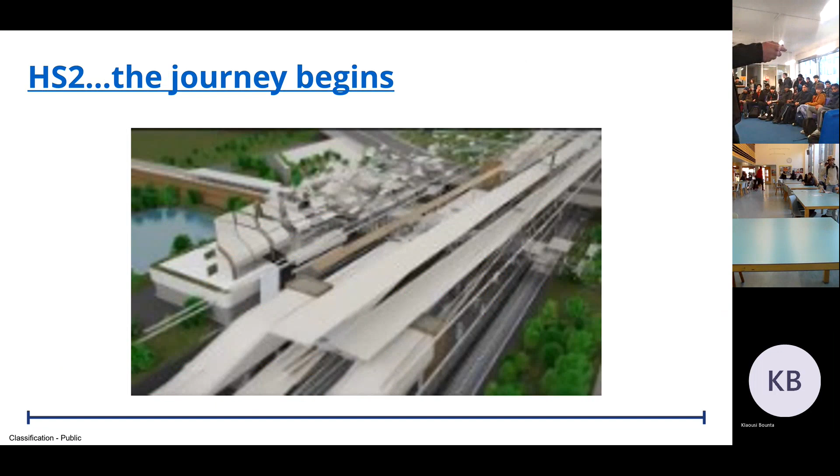So I'm just going to play you, if this plays, a video which will give you a sense of what it is that we're actually building.

So play it at the beginning, at the end.

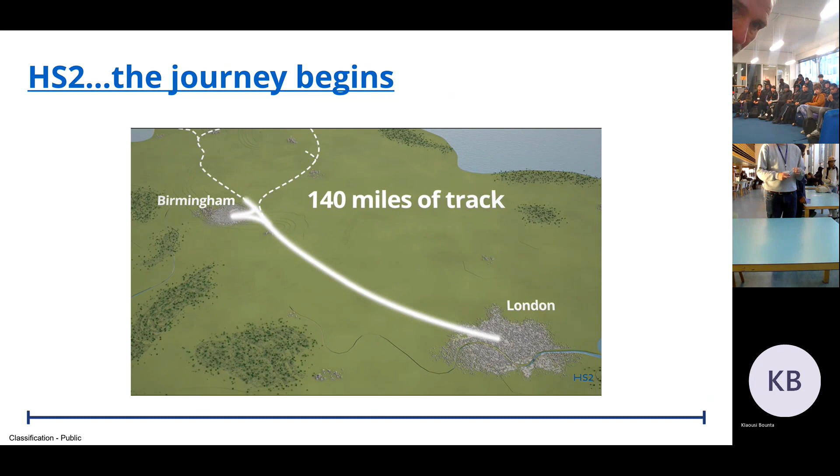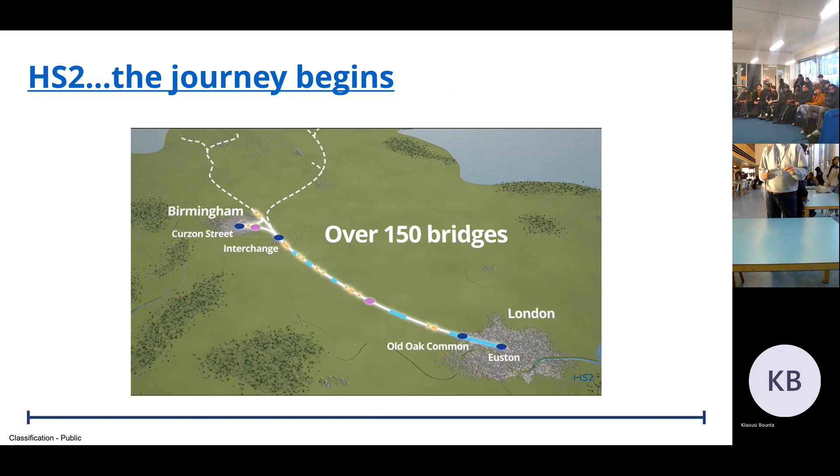Well, maybe I'll come up later because we haven't got the set right.

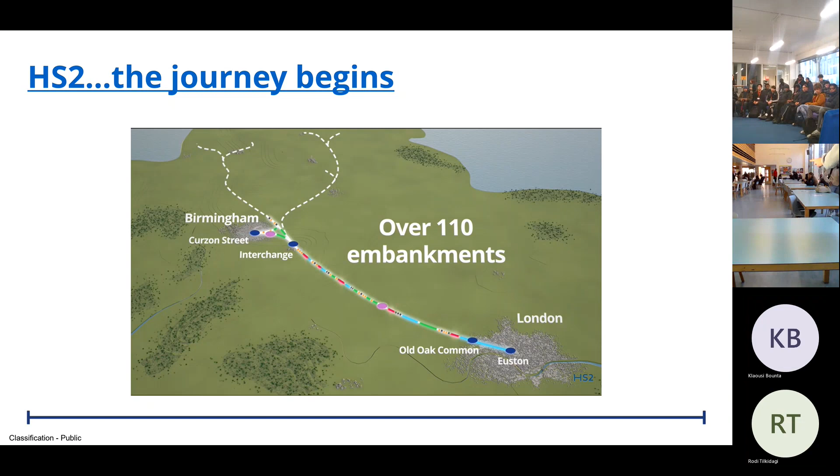So you can see from that video, it didn't actually play the whole thing, but what it'll actually do — so HS2 as a project will not only be building a train track from here to Birmingham, we'll also be building 4 stations.

There's the terminus, which is in Euston. There's a station being built at Old Oak Common in West London. There's one further up, just by Birmingham Airport, being built, called Birmingham Interchange. And then you'll have the destination station, which is Curzon Street in Birmingham. So that will be 4 massive, completely new stations built as a result of this.

As it said on that little clip, there's 32 miles of this that will be in tunnels, so there's a huge amount of tunnelling going on between London and Birmingham at present. Now, obviously, that's cutting into a lot of green belt land, so that means a huge amount of trees being ripped up, but they're all being replaced — in fact, more trees will be planted than were dug up. So whilst there's a lot of disruption happening, there'll be a huge amount of benefit for people living particularly in Camden, in London, out around Acton, and parts of Birmingham as well.

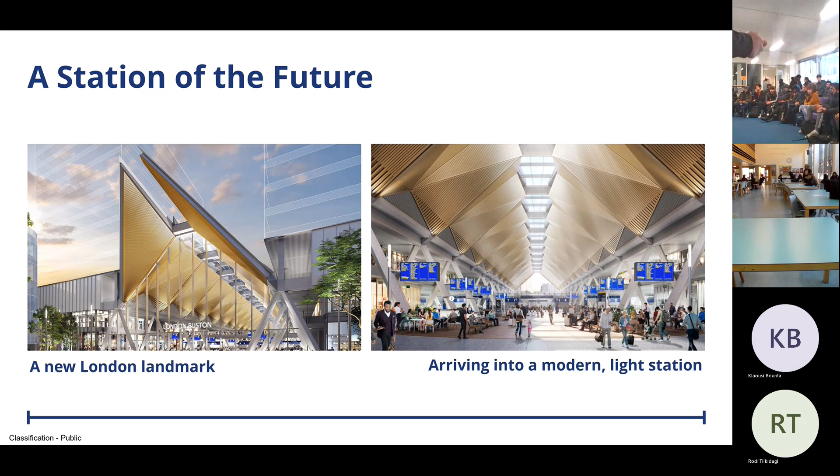We're just having to move things around at the moment. You know those jigsaw puzzles that are in a frame and you've got to move the pieces around until you get to the final solution. That's what this is like.

So when one of our senior people on the project was told about this job, he said, are there any obstacles around it? And they said, well, a few. And the few were there were buildings in the way. We had to do excavations.

Can you guess how many bodies or remains of bodies we had to bring out of the ground, because there was a cemetery, an old cemetery on the site? Have a guess at how many bodies were taken out. 40,000. There were the remains of 40,000 bodies that had to be removed.

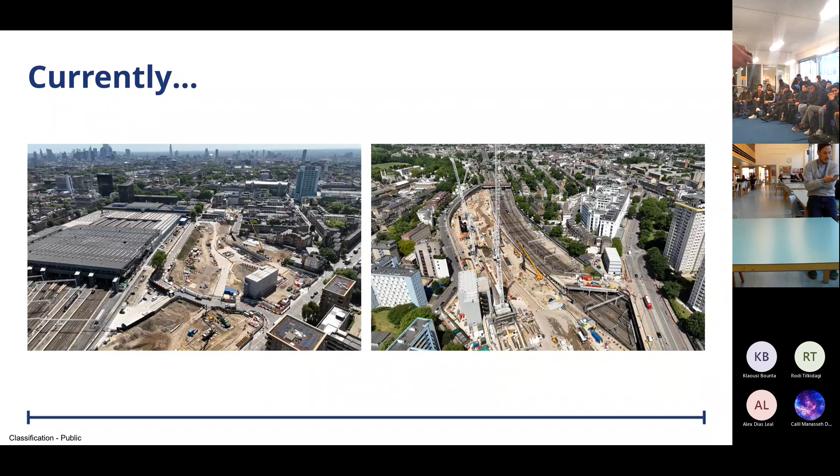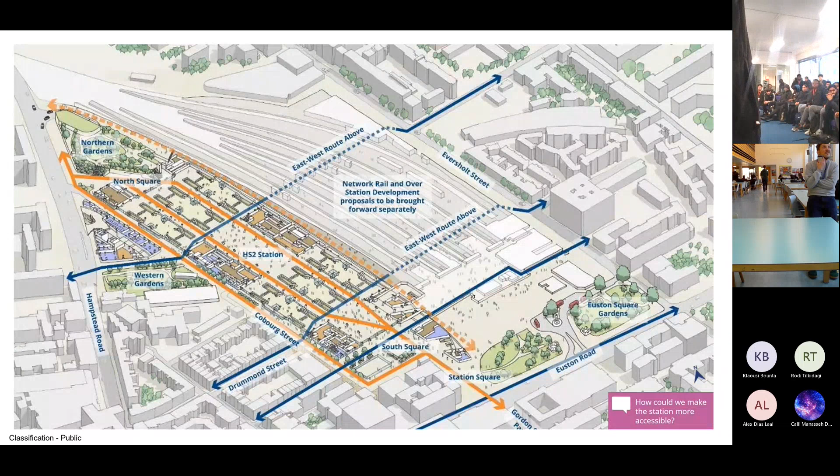And eventually it'll connect. If you're familiar with Camden and particularly around Euston, it's quite a difficult place to get around. If you're walking east to west, you have to walk right round the front of the station to get onto another part of Camden and then walk through.

What this station's actually going to do is connect east to west. You'll be able to walk through and up and over the station, and get around much easier. They're going to re-green a lot of the areas that are being dug up at the moment, so it'll make it a much more attractive place to come to, much like King's Cross is now.

King's Cross isn't just a station anymore. At the back of it, you've got Granary Square, you've got Google based there now. It's just revolutionised that area of London, and this will do the same for around Euston.

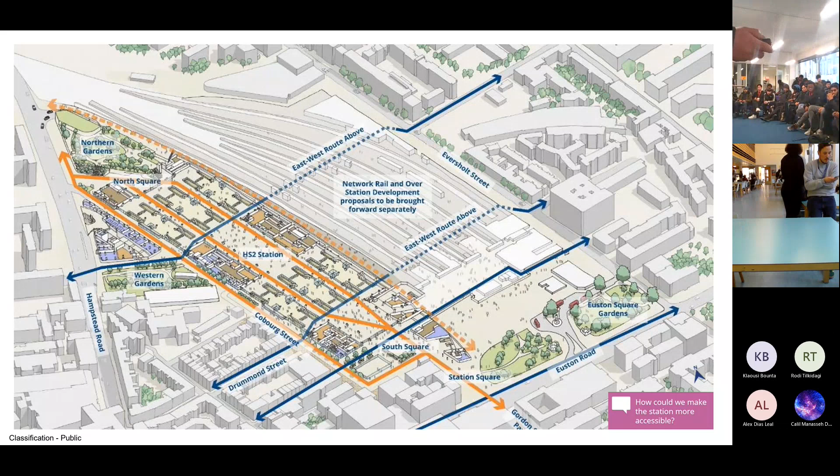As you'd expect with a station promoting sustainability and a much greener approach to travel, this is going to contain some of those elements. If you remember the sails on top of the building, one of the sustainability engineering solutions is to make sure that provides lots of natural light, so you're not so heavily using electricity.

The rainfall will run down the side, and that will create what's called a blue roof, so that all of that water will then be regenerated throughout the rest of the building.

So any toilet water will be coming out from the rainwater that's being collected, making it a much more climate conscious station, because HS2 is going to be an electric run train line. It's going to get lots of people out of their cars and onto the trains, so the station needs to be as carbon friendly as possible.

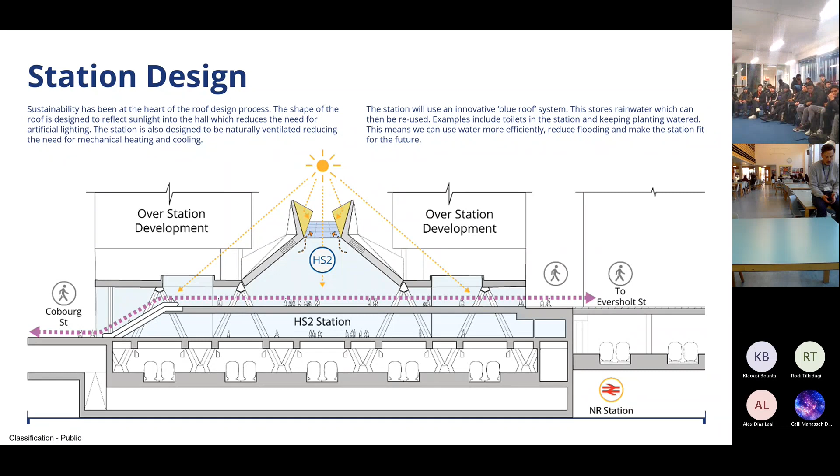And there, as I mentioned, you'll be able to get from east to west, and it's much more accessible in terms of accessibility, for people who are using wheelchairs or who may find walking quite difficult. So it's going to make it a much more accessible station in that regard.

But we're slap bang in the middle of, well, one of the busiest, if not the busiest road coming into London. Euston Road is an incredibly busy road, the main road out to the west.

You've got several buildings that are right by us. Right next to us is the Royal College of General Practitioners, so if you wanted to become a GP, you've got to go and do your final exams there. Well, you're right next to a construction site, so we have to stop our works at certain parts of the day because there are exams taking place.

We're very close to a number of small businesses, so we have to be respectful and mindful of our impact on them. We try to work with them as best as we can.

Do you know who the MP is for that particular area? No? He might one day be the Prime Minister. Yeah, so Keir Starmer is the local MP for Holborn and St Pancras.

Making sure that we are treating residents absolutely correctly, because otherwise we're going to have some fairly hefty complaints coming in. So we've got to make sure that we're being a good neighbour at all times. The works that we carry out, we have to make sure that we're not disturbing people who are living nearby. There's always going to be a bit of disturbance that takes place, but we've got to be mindful of how that impacts upon people.

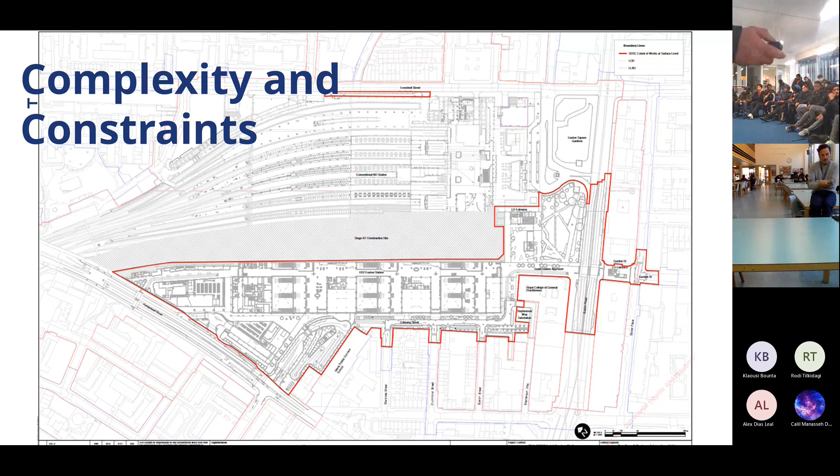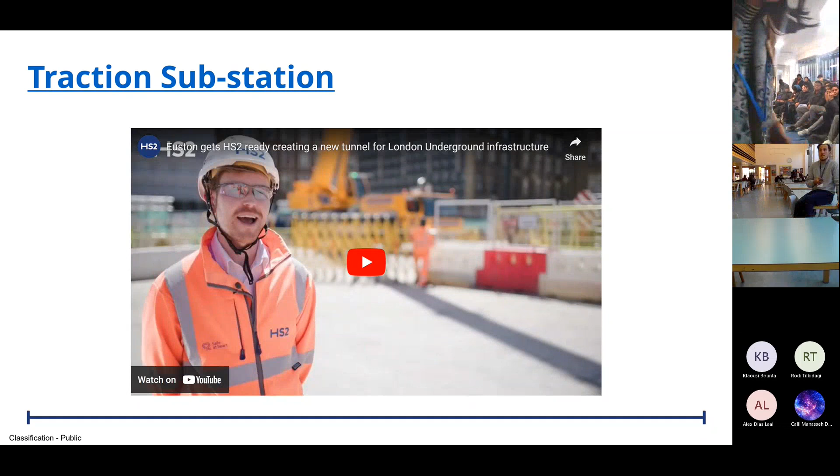And so all of our works are carried out with that in mind. So it's a really complex project, and one of the bits of it that's quite complex is what's called the traction substation. So I'll run through this bit if the technology works.

Oh. The future Euston Station.

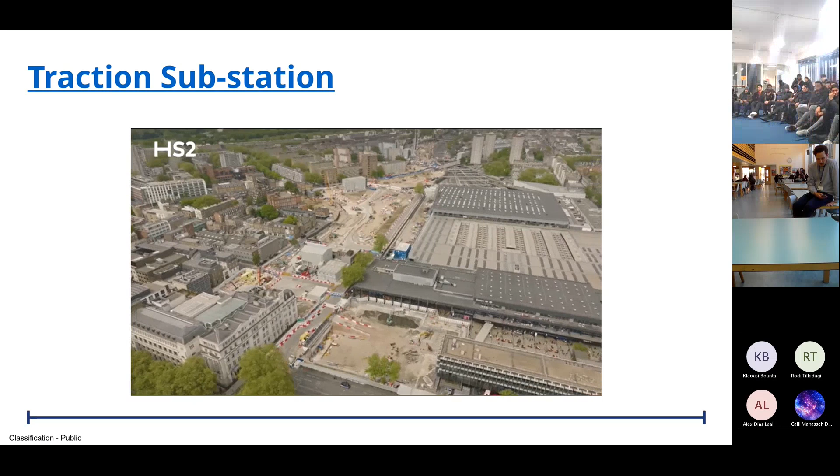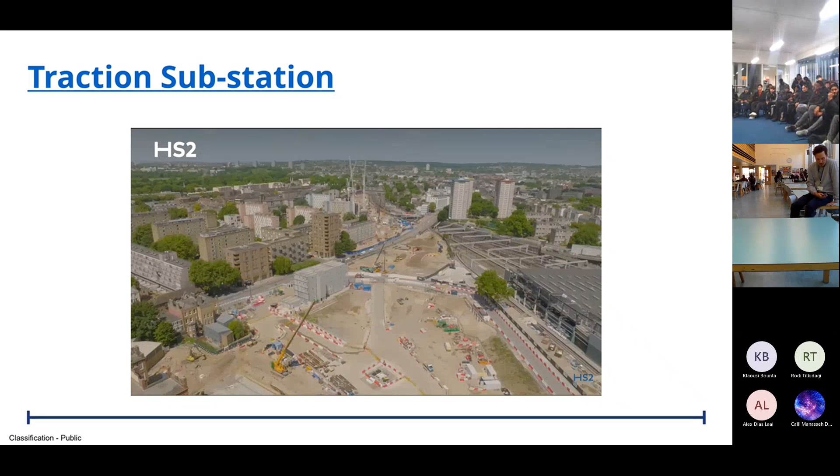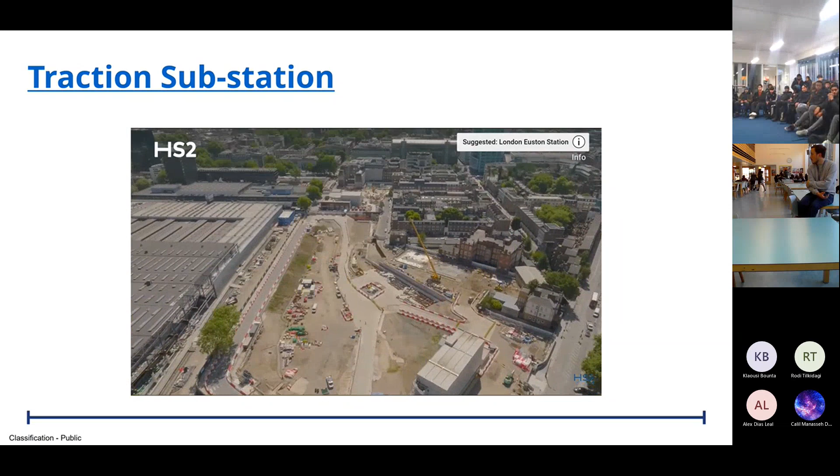Euston Station is expanding. High Speed 2 is going to take the form of this entire area here. The existing traction substation sits within the footprint of that new station. We therefore need to relocate it out of the way so we can excavate the basement for the new Euston Station. Traction power and ventilation substation provides power to tracks, trains and supporting stations.

The trains, when they move, they give off energy, which creates a lot of heat, and therefore the supporting ventilation system cools down the trains, ensures that the trains can carry on moving as well as the passengers can feel comfortable.

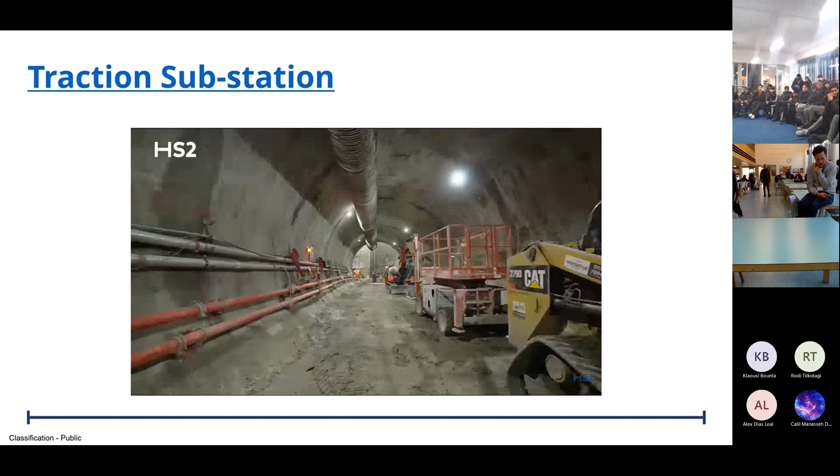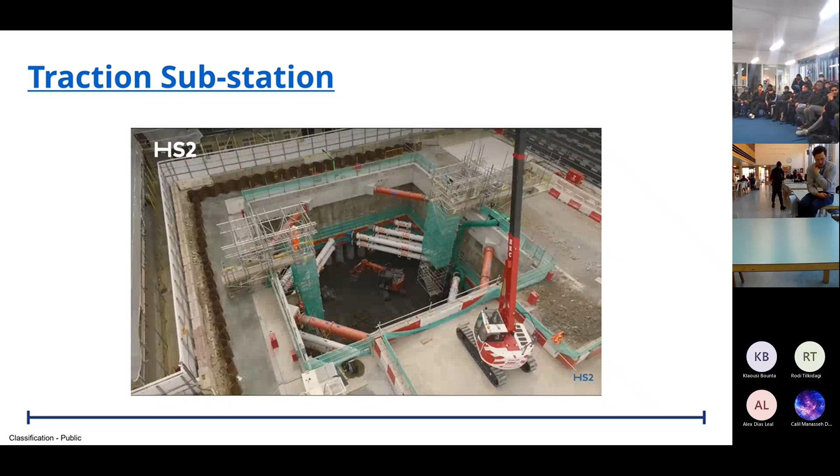So on the TSS, we've got two sites. To the south of the site, we have 104 interlocking piles. They create a 20 metre by 20 metre box. We've just completed the excavation of that box. It's 20 metres deep, and that provides the basement for the substructure and superstructure to be formed.

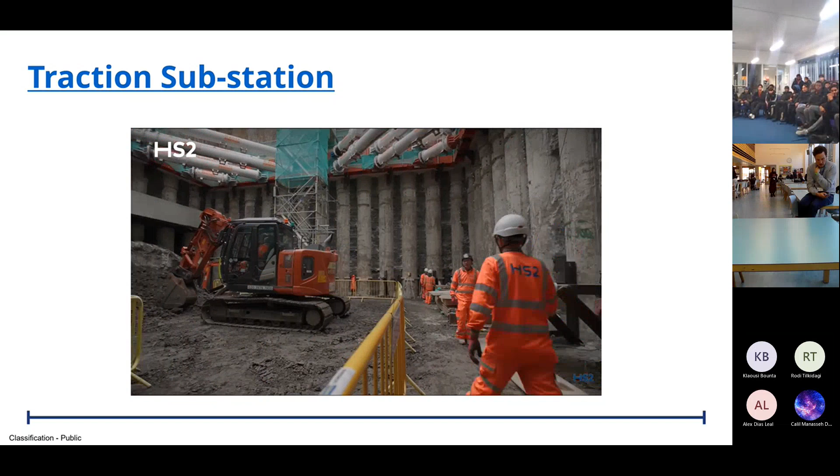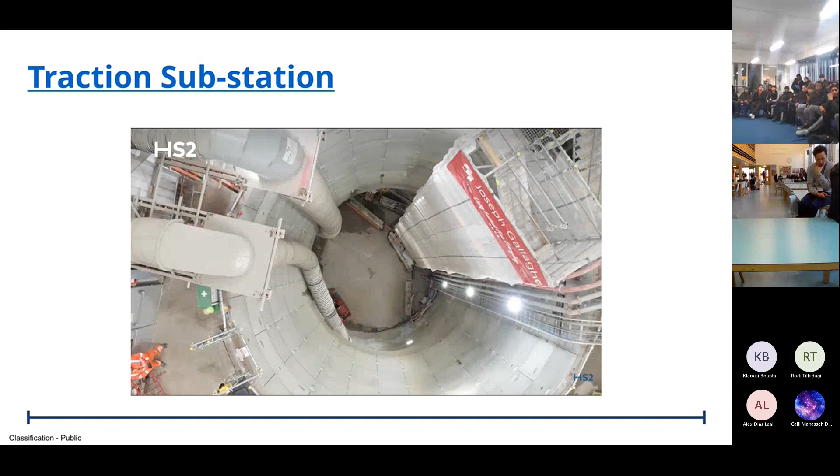On the north of the site, we have sunk a 20 metre deep construction shaft. The upper part of the shaft is formed of precast reinforced concrete elements that form a caisson, and the bottom half of the shaft is spray concrete lining. It's high pressure concrete that's got tiny steel fibres that are there to support the excavated ground.

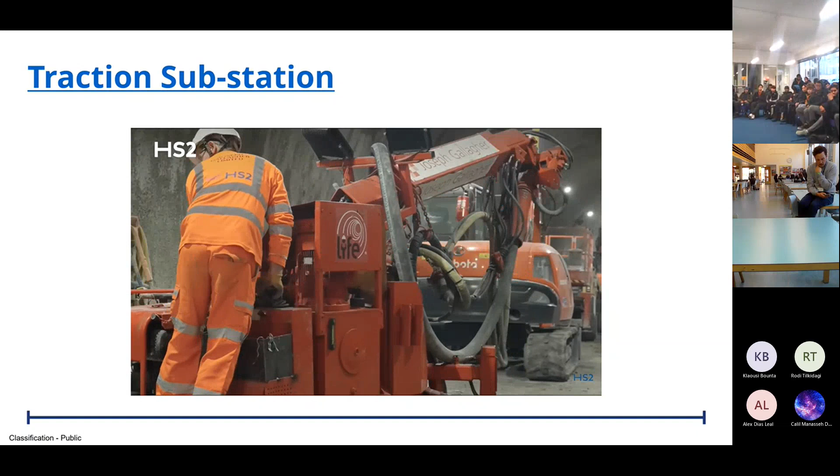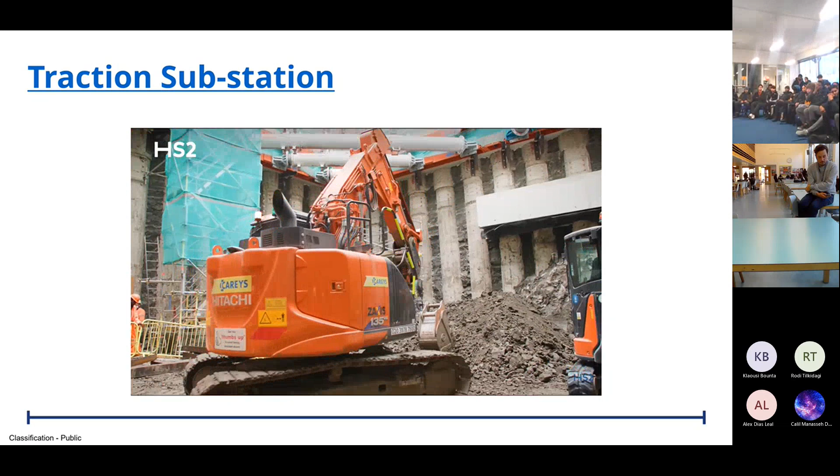We've had some fantastic innovations on the project so far. In terms of design, we redesigned one of the tunnels so it was more efficient, but it also didn't reduce performance. We also reused some material from the previous demolition contractor. Those two innovations saved about 1,000 delivery vehicles off the road and saved about 250 tonnes of carbon.

So one of the important measures we must remember is that we're visitors in this area to the businesses and residents around Euston. One of the important measures we've put in place to ensure we don't disrupt the local community is just to the north of site, we've installed an acoustic shed. That allows the tunnel operations to take place 24 hours a day, whilst also controlling our noise emissions.

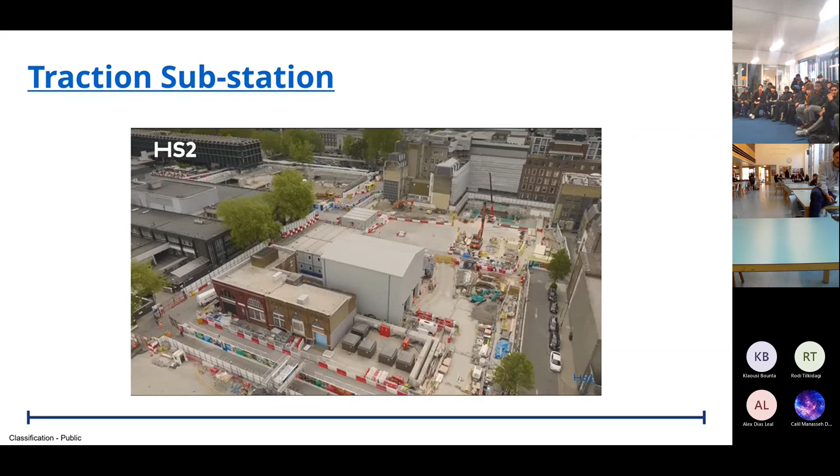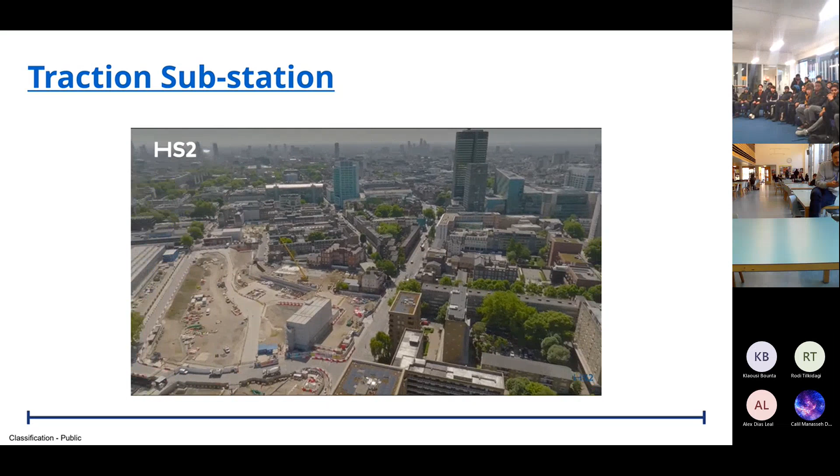So we've had some huge challenges so far being in central London. The tunnel itself was like threading an eye through a needle. Above us, there's some high voltage power cables. Below us, we have some TfL running tunnels. To the west of us, we had a Thames Water trunk main, and the HS2 station itself sits on top of the tunnel. So our tolerance levels are very tight, and we have to make sure that we're to the very specific detail.

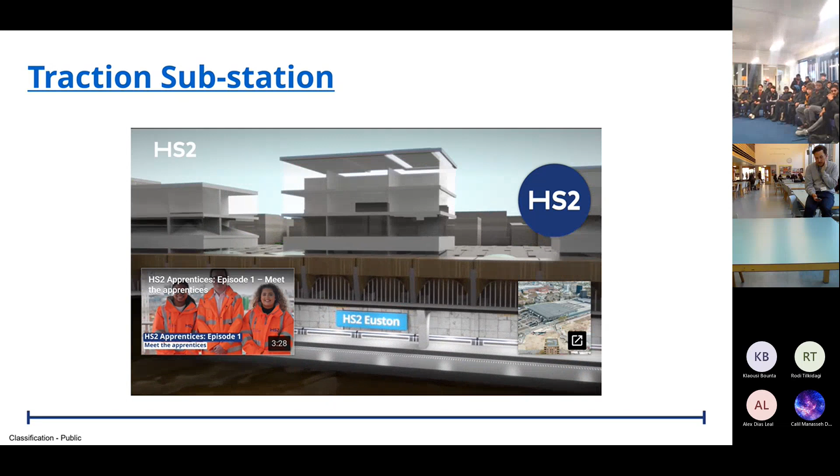So it's a really complex thing to have done. This old station, I think I've got the picture of it just there. So this was at one time Hampstead Road Tube Station. It's been discontinued for a long time, but it housed all of the power for the Northern Line, and it would have housed the power for part of the Network Rail Station as well. So all of that had to be rerouted through a tunnel. I've actually walked through the tunnel, and Max will be able to talk about it because you've worked on that part of the project. It's just phenomenal. When Rob was mentioning about that acoustic chamber, no sound, no disruption actually escaped from that building, and they were tunneling 24 hours a day, 6 days a week. It was phenomenal. It's an amazing achievement to have been able to dig through that.

And it's the set, so eventually it will have a new building that's in the process of being built at the moment. And that shaft that they showed from the aerial view had all of these sensors around it. It just shows the advance in technology.

So Rob, the senior project manager, was on his honeymoon in South Africa, and he got an alert that there was a problem in the shaft. The sensors are so intelligent that as soon as anything near it isn't quite right, it sets off an alert. What it was, one of the buildings that's quite close to the shaft had erected some scaffolding and hadn't told anybody that they were going to do it. So it was sending these messages that there was a problem at the station. So all of the stuff being used on the station and the site itself is of the highest possible technological advancement now. So working on a station like this is using old engineering solutions, but with new technology to be able to deliver that.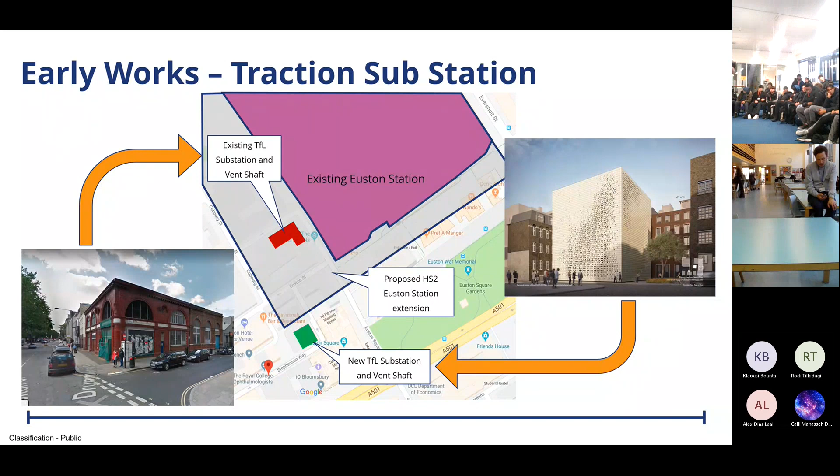We're also building a skills centre where we'll all be housed in. This is an old school called Maria Fidelis, which is on the site itself. That's being adapted and changed into our site accommodation, but also a skills centre. So there'll be college courses that will be delivered out of there. There'll be training programmes that will be delivered out of there as well. And we'll deliver our work experience programmes.

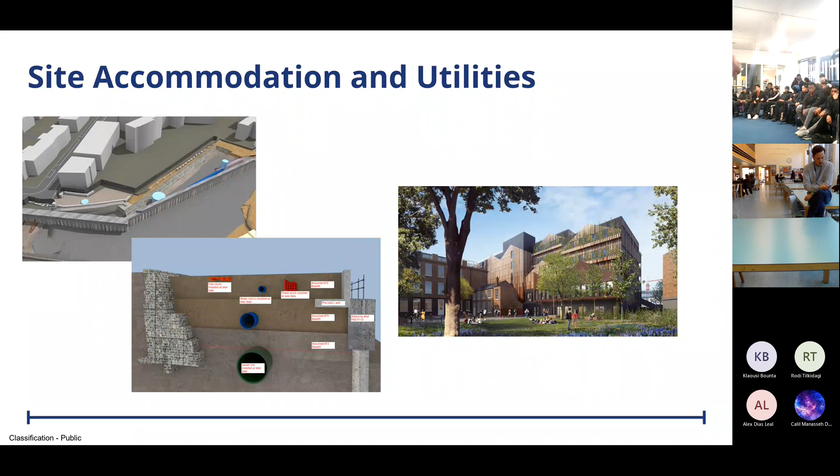Huge amount of utilities that have to be diverted so that things can operate without great big water mains running through the whole section of the site, or electricity cables that need to be capped off and not used anymore. So there's a huge amount of work that needs to take place before we get anywhere near actually building it. And then it's not just the high-speed station.

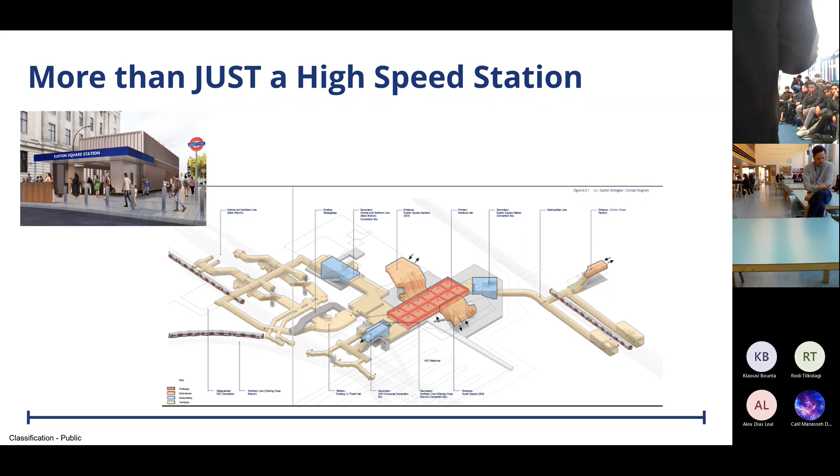So we're also building an interchange for Euston Square. If you know Euston Square, it's sort of away from the mainline station. So you come out of Euston Square and you've got to walk all the way down Euston Road to be able to go and get on the mainline train. Well, this will connect that. So it will mean that you've got 3 tube lines that will be much easier to connect to, and there'll be greater accessibility.

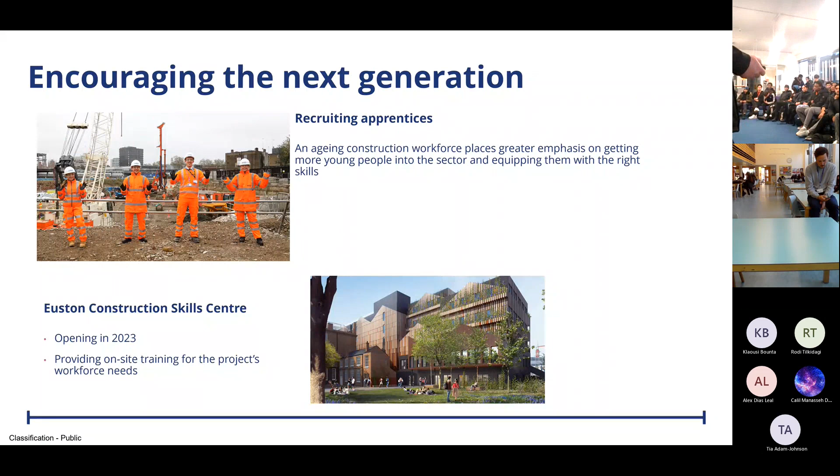And certainly that's what we've been able to do, recruiting a large number of apprentices across the last 3 or 4 years that we've been going. One of whom is Max. So I'm going to hand over to Max so he can talk about his experience.

Yeah, so I'm Max. I'm a construction management apprentice on HS2. Like Barry mentioned, I started out as a construction trainee coming from sixth form, which I guess is similar to what you're doing now, and then finish this and then uni or whatever - hopefully do what I'm doing.

So yeah, come out of that, went on to Heathrow straight away doing construction of air bridges, air bridge replacement, that sort of thing, which was all right. I was there for about a year doing that, then came out for furlough and COVID hit. Then came straight onto here, where I've been for the last couple of years now.

Started out at the TSS, so traction substation, which is what Rob was mentioning in that video, which was pretty awesome - just the sheer size of it and the civil engineering side of it, which was pretty cool doing that. We've got turning around 40 loads of muck away when we're excavating, digging that box, that 20 by 20 box, excavating material all day long, bang, bang, bang. And then we're also digging a tunnel as well, 66 metre long tunnel, concrete spraying, which is pretty cool as well.

So what I actually do is reporting, so shift reports every day, labour numbers, what we've actually achieved, targets we've hit, work we haven't hit, that sort of thing. And then any delays that we've had, I report that to my PMs, whoever I'm reporting to, report any delays we've had, make sure that we all know where we are with the programme. And the other side of that, the new programme we're given, so you know what the programme looks like, you've got your dates, your activities, that sort of thing. But I report against that basically.